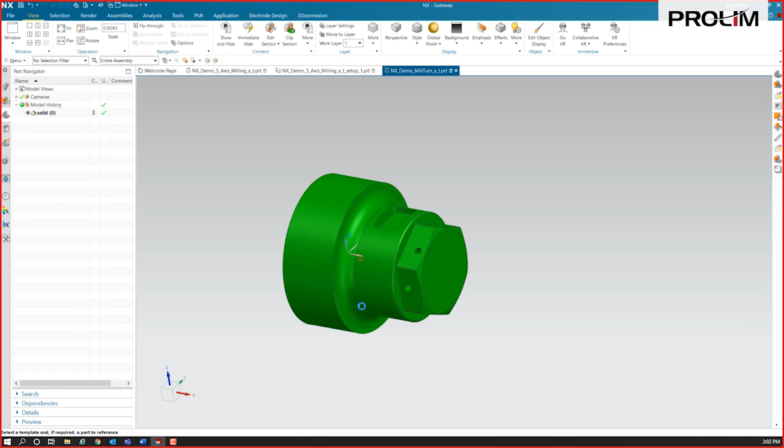So here's a part that we'll do a quick turning operation on, and we'll mill some of these features as well. I'm going to create a brand new file from this, from my master model, and put this on a machine we've got - an Integrex i200. This will give you a little insight into turning, mill-turn, and simulation.

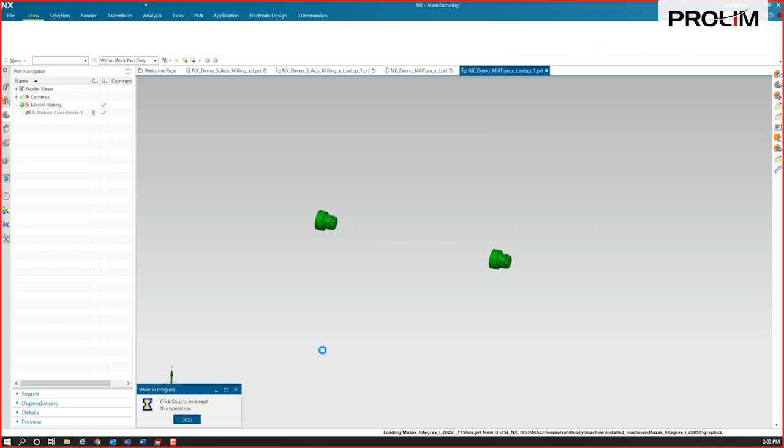This part happens to have dual spindles, so it actually brings in the part for me twice. I'll turn the model of the machine on here. So here's the machine - we've got a main spindle and a sub spindle.

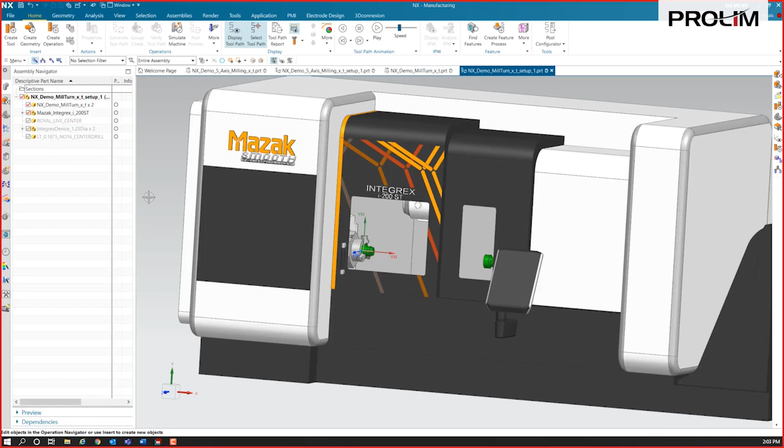Again, I'm going to start with some assembly constraints and line everything up, position everything first. So we'll start with assembly constraints. I always like to fix that machine first - I want the parts to move to the machine, not the machine to the parts.

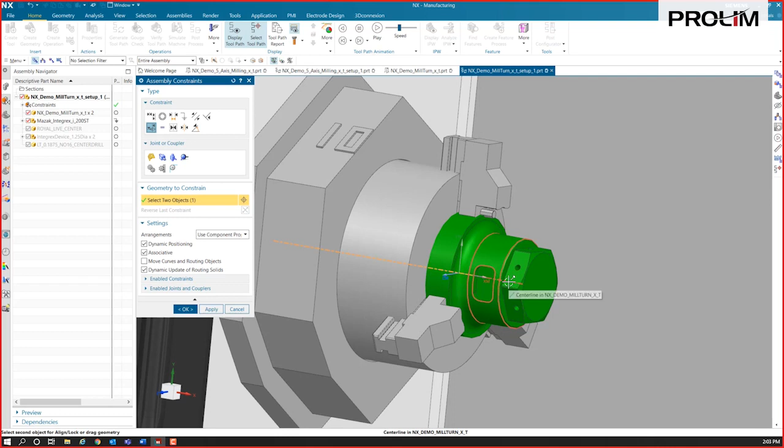So from here, we've got this one. I'm going to do an align lock where I can just grab the center lines of the parts and it's going to lock those up. We'll do a distance - I'll move this out just outside of the chuck a little bit there.

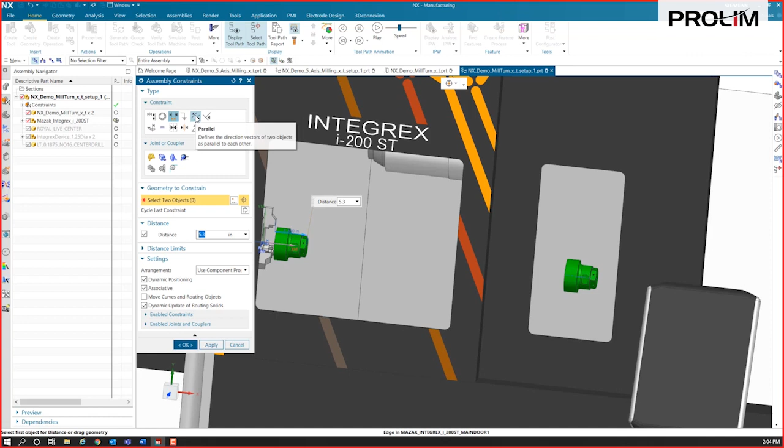All right, I'm going to go ahead and constrain this one up over here as well. We'll do a parallel here - I'll make this surface parallel to the other part here, and I'll do a center line on it.

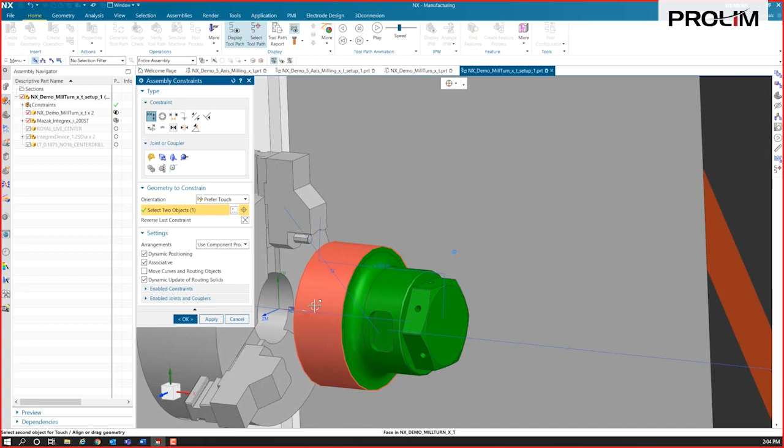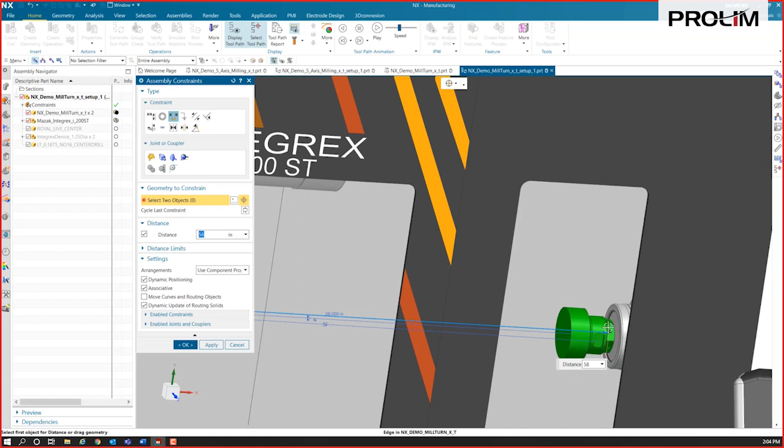So we just like to position it this way. I mean, we could certainly grab the part and just move it and lock it down too, but I like to do some of these where it's really fine-tuning exactly what you want. So I'm going to do this one as well - I'll make a distance constraint and move it out to about 58 inches should work there. So now we're all locked into place here as well.

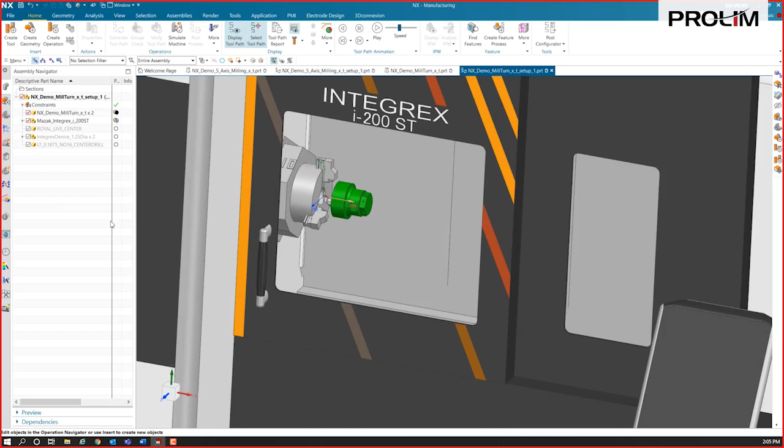Next thing I'm going to do again is that wave geometry linker - we're going to make those associative copies of these parts, that part and this part. And the next thing with this simulation that I want to do, as this spindle is turning, I want the part to actually turn with it when I run the simulation. So I'm actually going to add that into the kinematics for the part. I'm just going to define the part really quickly, as well as on the sub spindle - I just have to define that part.

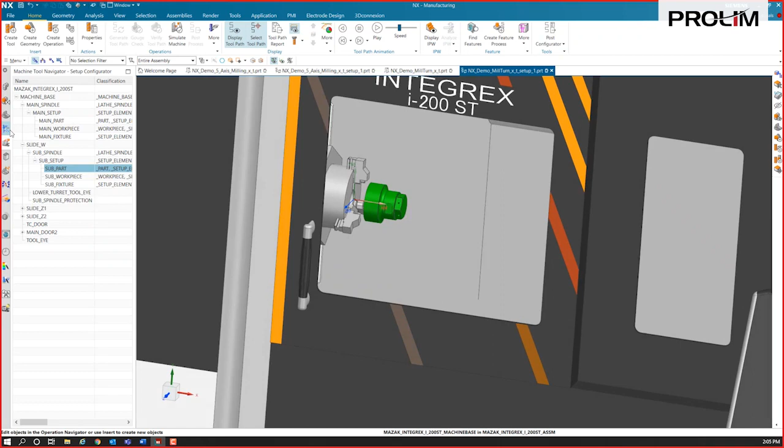All right, so now we are going to define all of our geometry. We'll take a look at these items. So this is for, kind of like, a multi-channel - this one isn't necessarily multi-channel, but it's a dual spindle. So we have a couple of parts that we're going to define here.

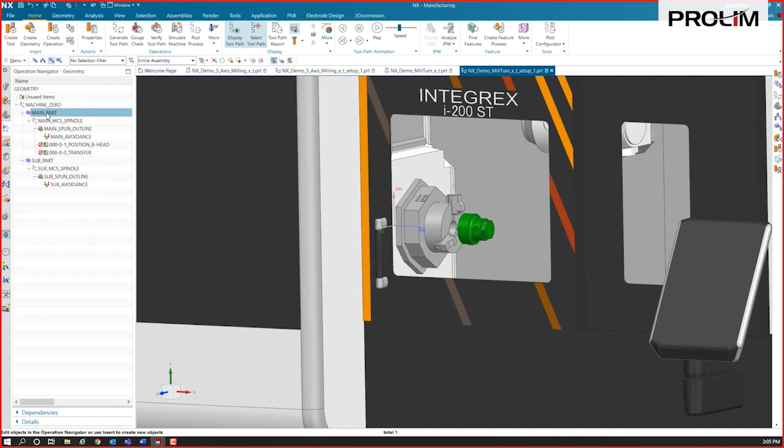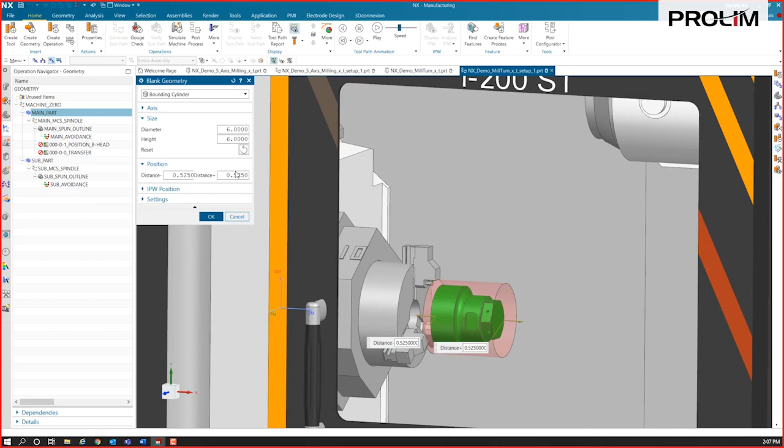So I'm going to start with my first part here, and I'm going to specify our blank using just a bounding cylinder on this one. I'm going to change my diameter of my raw stock to about 6 inches, make it about 6 inches long as well, and we'll make 50 thousandths on the front, so we're chucking on a little bit of that material on the back side here. Again, if you want to do the check geometry, we'll specify that chuck as check geometry there.

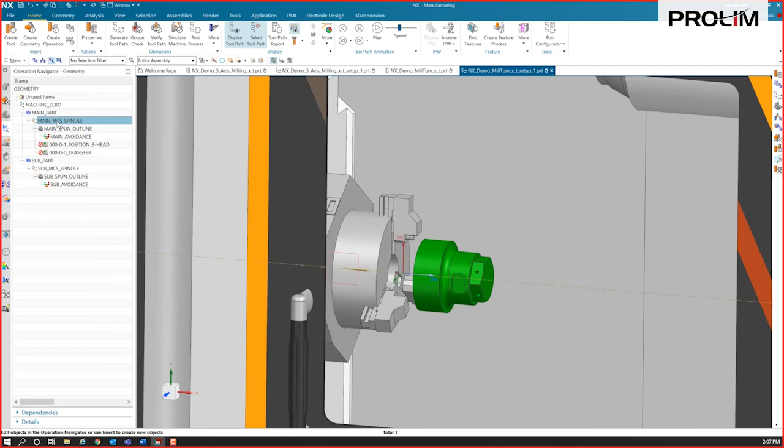And for turning, what we have is what we call - I'm going to hide that part there - what we have is what we call a spun outline. So I'm going to set my MCS for this spindle. But what we have is a spun outline, because as these parts are turning, obviously we want to know what diameter we want to turn when it's spinning. So that's what it gives us as our spun outline. So if I look at the spun outline, that's what I actually want to create as it's turning.

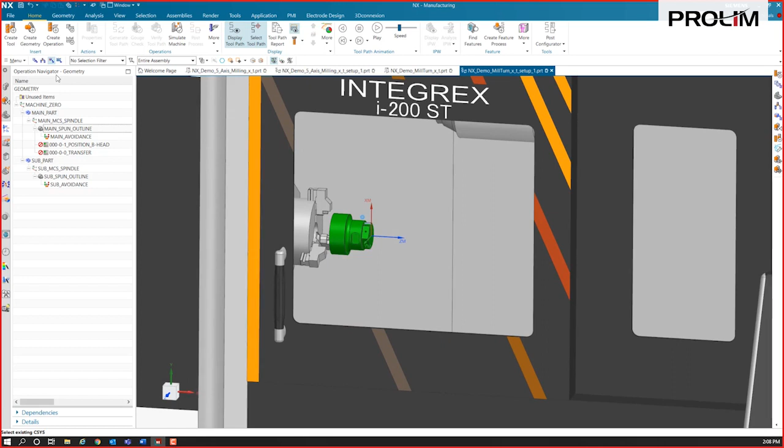We'll come back and mill the milled features later. All right, so that's our spun outline, as well as our spun outline for our blank is up here. So we'll create a couple of operations to turn this part. I'm going to start with a facing operation. And I've got a number of tools - this simulation already had some tools built into it. I've got an OD neutral tool that we'll use for that one.

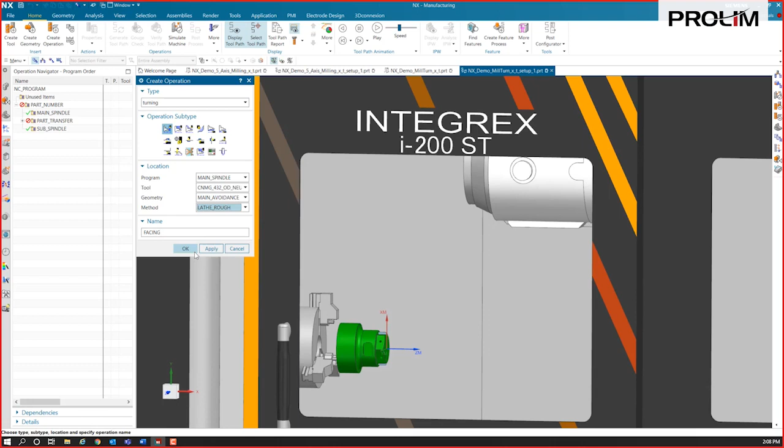We'll just rough it with the lathe, doing a lathe rough and generate that one. So there's a facing operation, and it shows the yellow as what the IPW blank was, and the green is what it just faced away.

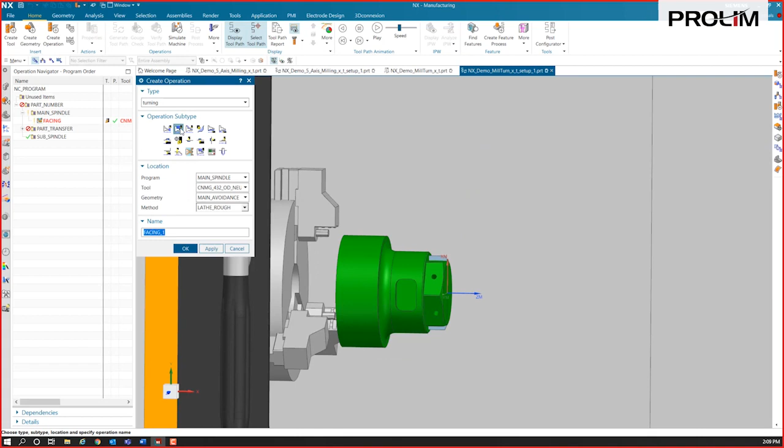I'm going to go throw a couple more operations on here, and then we'll simulate the whole thing. Let me do another operation called rough turn OD, so we're going to just rough the outside of the part.

Here, what I want to do is use a trim plane. It's going to try to cut all the way through there, and we want to make sure it stops where we want it to stop. The check geometry can assist on that too, but we can use this tool. We want to cut through and just stop it right around here, around that spot, so we can do an axial trim plane or a radial trim plane using that, and we can generate it. You see it's just going to stop there, short of those jaws.

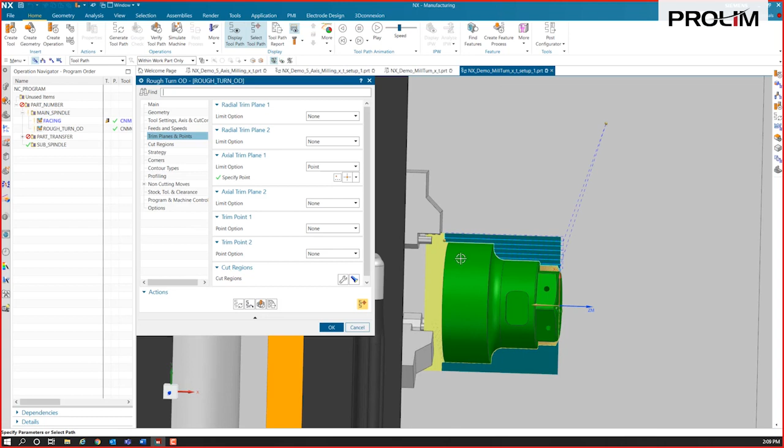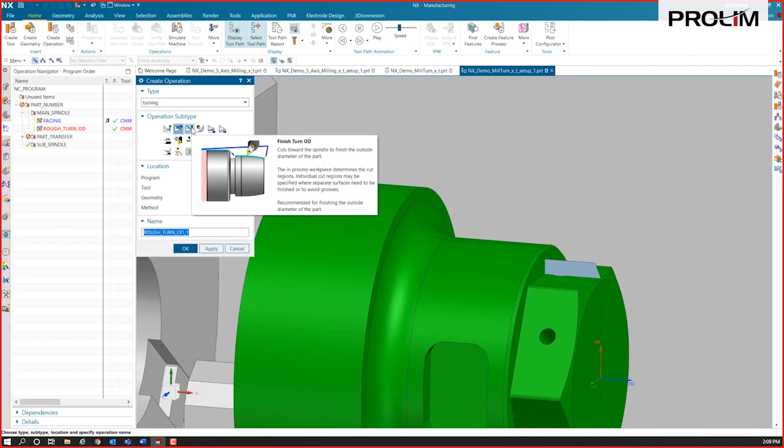So that's our roughing operation, just some simple roughing. In fact, I could take this a step further and go into this profiling, adding additional profiling. That's just going to take it right to a finished size now. It essentially took that, and if I were to create another operation after that and do a finished turn OD, it would just grab that and put it right into that operation for us.

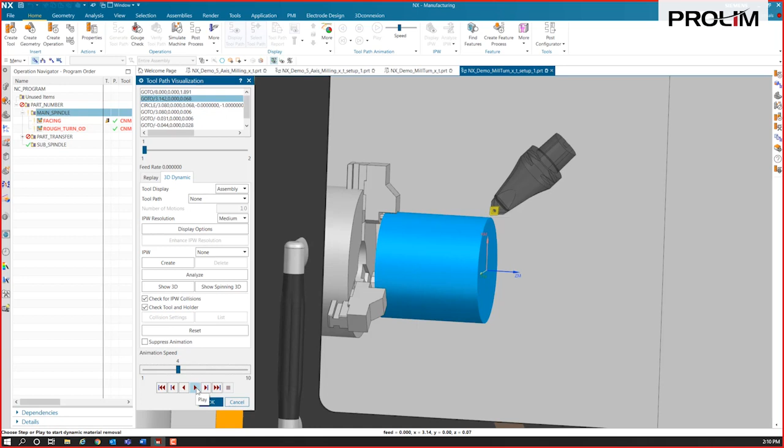If I look at that now and verify this, I'll run it through a quick verification. This is not the machine simulation, this is just a toolpath verification here. So it's just going to rough it down, then come back through and do a final finished pass like that.

Now we can go right into some of our milling on this. I want to mill this pocket first, for example, so we're going to create another operation and switch down to our planar milling operations, using that floor and wall that we looked at before.

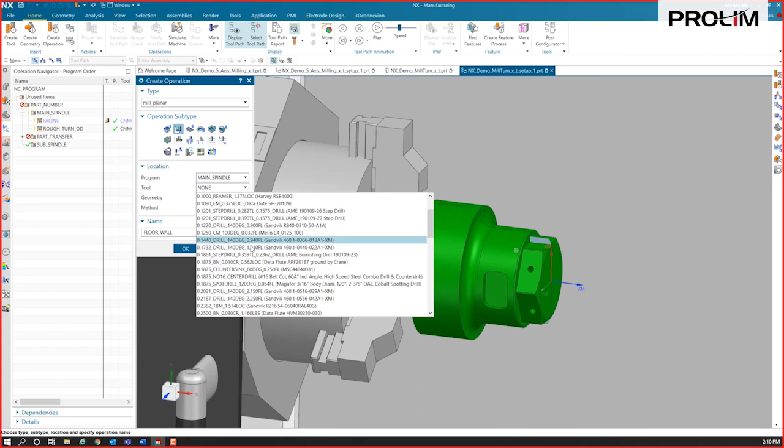I think I can fit a half inch - let's see, diameter 600 - yeah, a half inch end mill I can use to cut this. So I'll scroll through my tools and find a half inch end mill here.

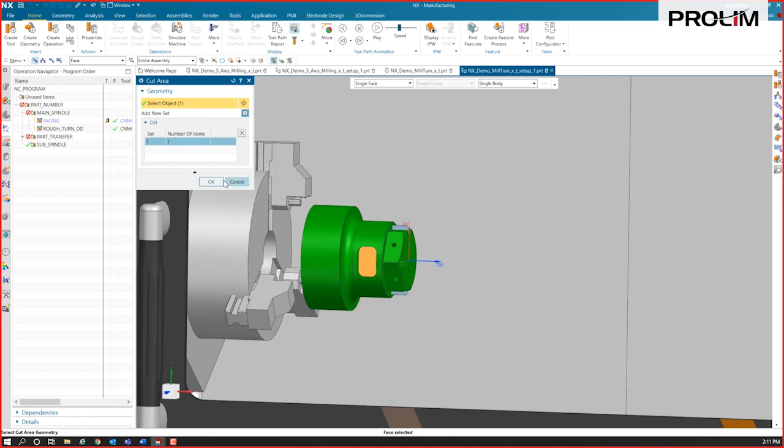Set your variables for what you want to cut, and we're going to tell it the floor of that, specifying that floor. It's going off of this MCS on the front of the part, and we can simply generate that. Once we run the simulation, it's going to know to tilt that up 90 degrees and mill from there.

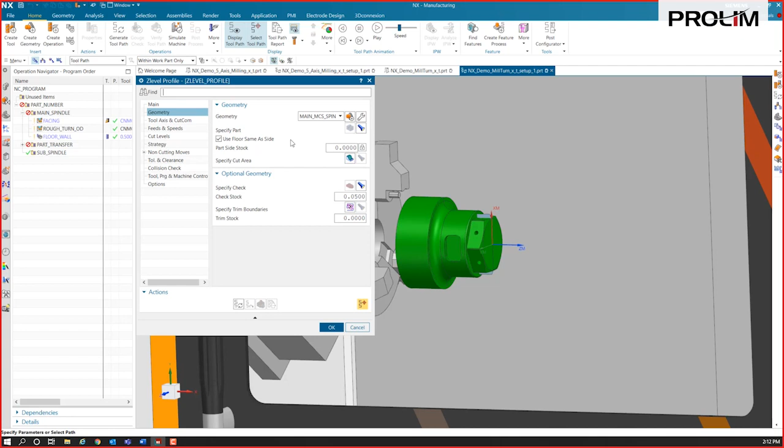The next operation, I want to cut this hex on the front, and I'll show you a couple different ways to do that. Let's start with creating an operation - I'm going to switch back over to that Z-level profile and specify some geometry. I'm going to specify some cut area, and again I like these face rules. I'll switch to tangent faces and grab one face because they've got those corner radiuses. All of them are tangent, so I can quickly grab those, and I'll just generate that.

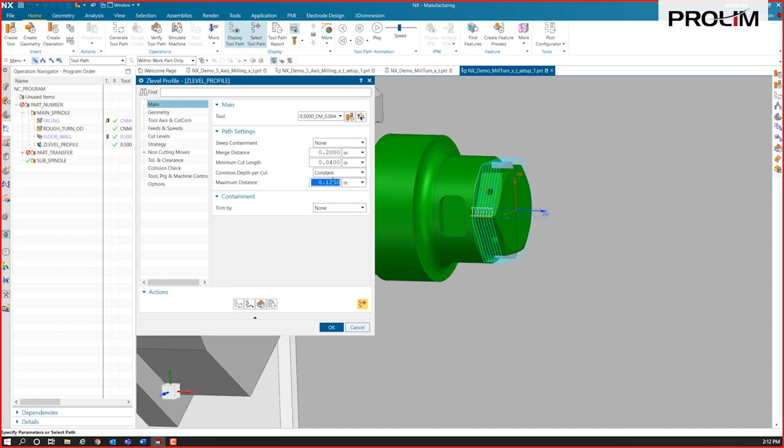So we can cut that. If you want to take it in multiple depths, we could change it to taking an eighth inch per pass, or a hundred thousandths, a quarter inch, whatever you want to do. I'll change it to 300 thousandths in this case, so that's going to take that tool and run it around the part.

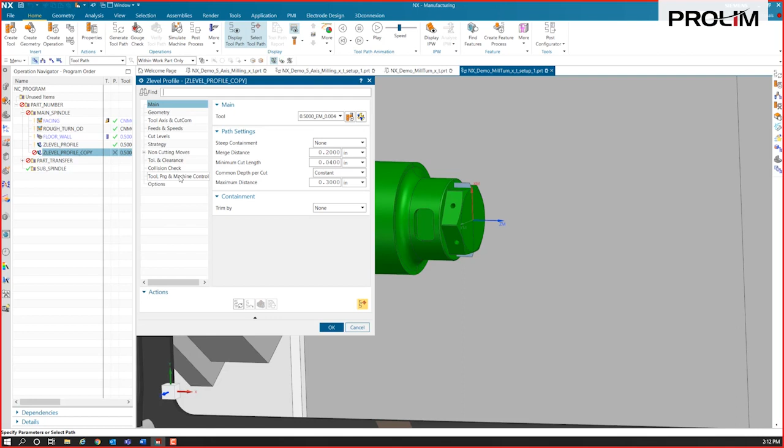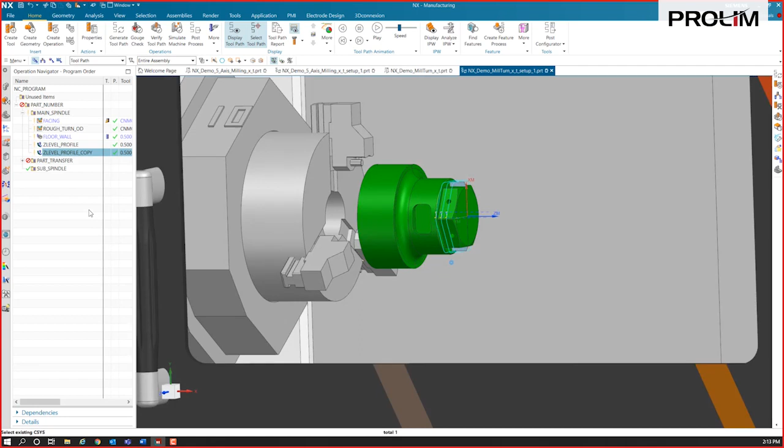Another solution - I'm just going to copy and paste this and show you another solution we can do inside the operation. We can make it more of a polar mode by using user-defined events, making this a polar event so the C-axis is what rotates for the cutter. I'll go ahead and regenerate that - the toolpath will look exactly the same, but once we verify this and run it on the simulation, you'll see the difference there.

I also want to drill these holes.

So let me see what diameter these are. They're 1/4 inch diameter. I don't know if I've got a 1/4 inch tool, but I could add that in, but I'll just find something close.

I'll switch to a drilling operation, and we'll find a 1/4 inch. I don't think I have a drill though. Yeah, so here's a 218 drill.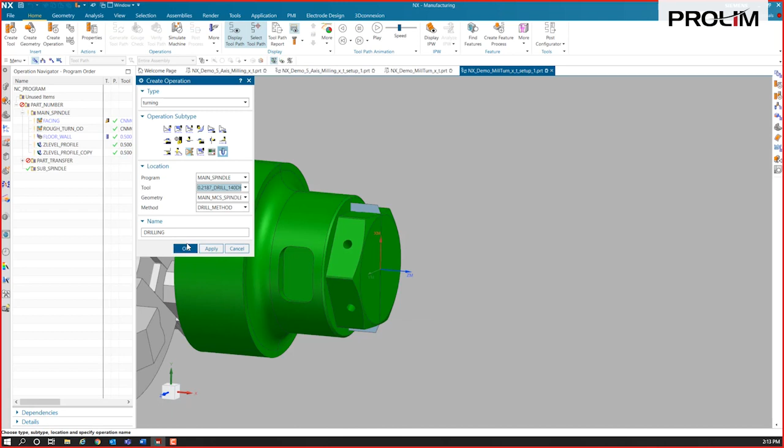Which is good because I'd like to show you how we can look at that preview of these drills. So it's previewing what it's going to drill. It's not just previewing in pink the hole, it's previewing what it's going to actually remove. So it's a little smaller because that drill is a little smaller.

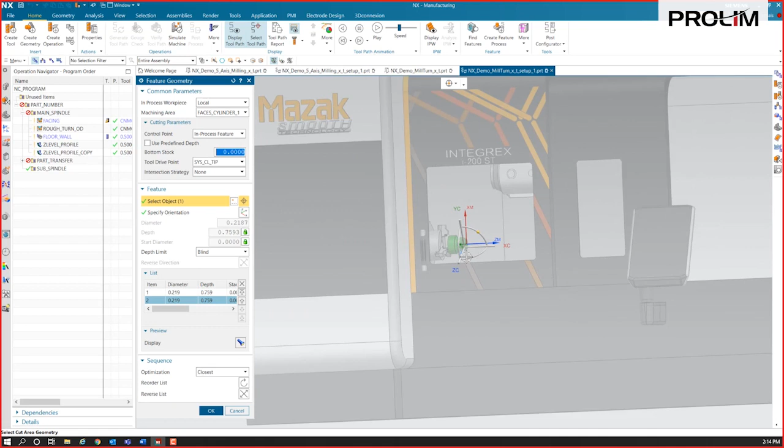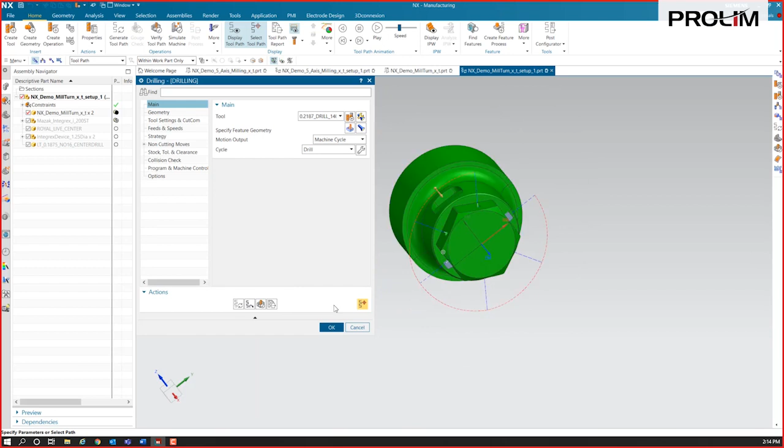All right, and then we're going to just work our way around and select all these holes. My machine's in the way, so I'm going to hide it away for a second. We'll work our way right around this, selecting all these holes. 5, 6. So we've got all 6 holes there. And we'll just generate that one. So there's our holes generated.

It'd be simple enough if you decide something's out of order a little bit - I'll turn our machine back on - you can grab that drilling operation and move it up and reorder things pretty quickly. It'll let you know that there may be some things with the IPW that it's going to have to update and redo some things. You just have to regenerate toolpaths then.

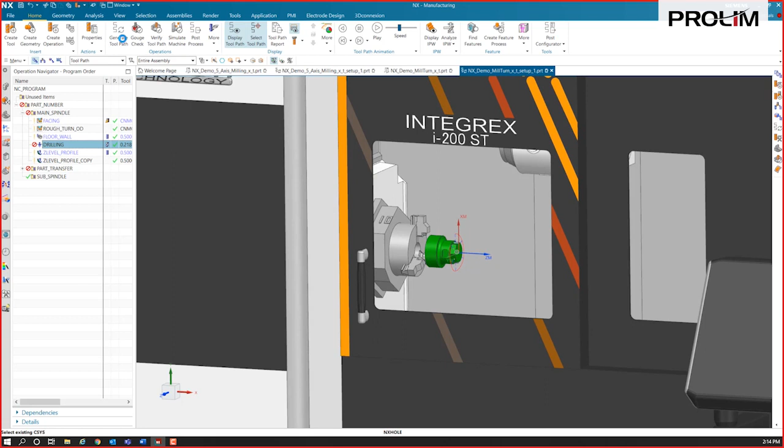So that's the toolpaths for the front. Let's take a look. We'll just go ahead and run this through a simulation here.

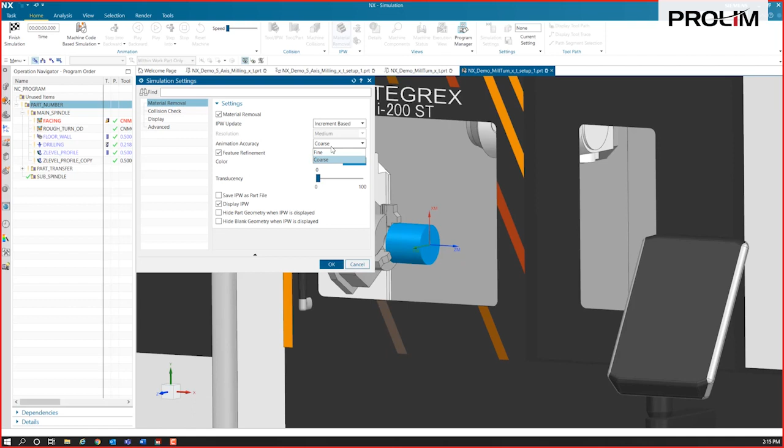Let's see what we get. We'll set up, we'll show some material removal. I can set some simulation settings. We can make these increment based, fine. We can make this translucent as well, if we want to see through it a little bit, we can see our part in there now. I'll turn our spun outline off for now too.

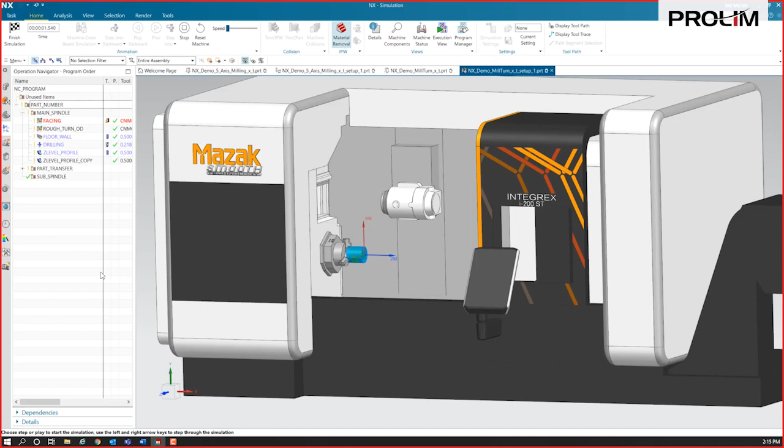So let's go ahead and run this through and see what we get out of our simulation here. So we've got the tool changes in there, and then you'll see all the spun kinematics start up, and you'll see the material removal.

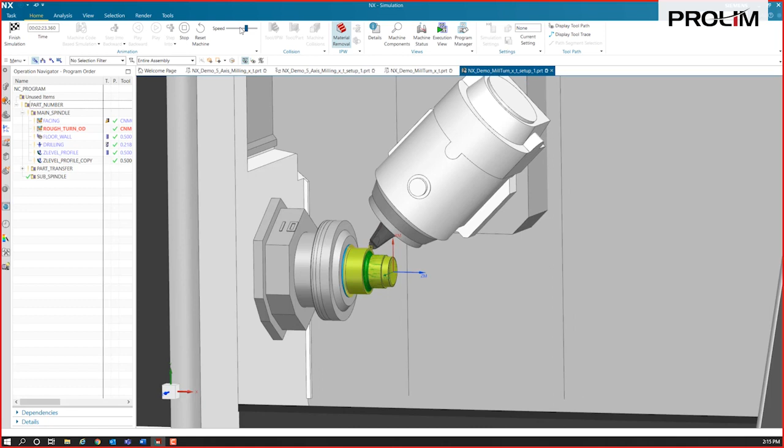Okay, everything's stopping short. There's our next tool change to our milling. You can see everything spinning up for it, and then it mills it out.

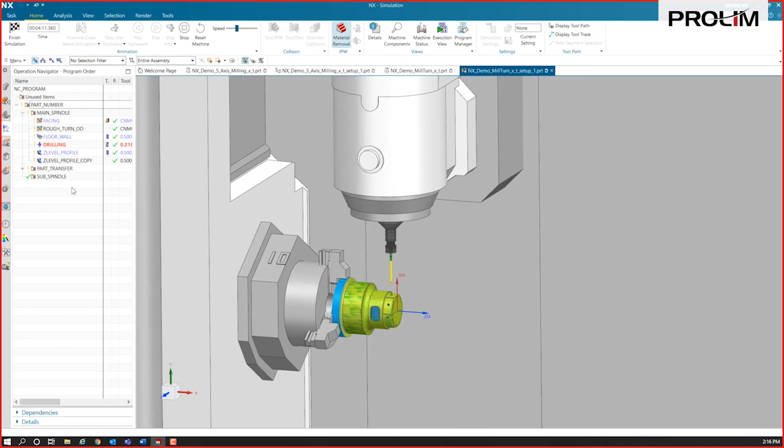Here's our drilling. And then the next one are the Z-level profiles, where one of them is going to be polar, the first one is not. So the upper head here is actually moving around the part, as opposed to the second operation where the part is going to rotate. So this one, the part is actually just rotating using a polar operation here.

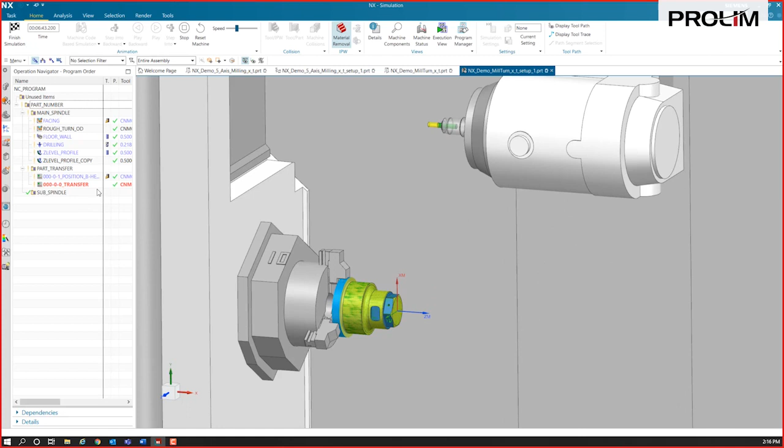All right, and then we're doing a part transfer, and it's going to move that IPW over to the second side. I've got those set as UDEs in here that I've already populated, and it just moves that right over to that sub spindle. And now we can create our facing operation.

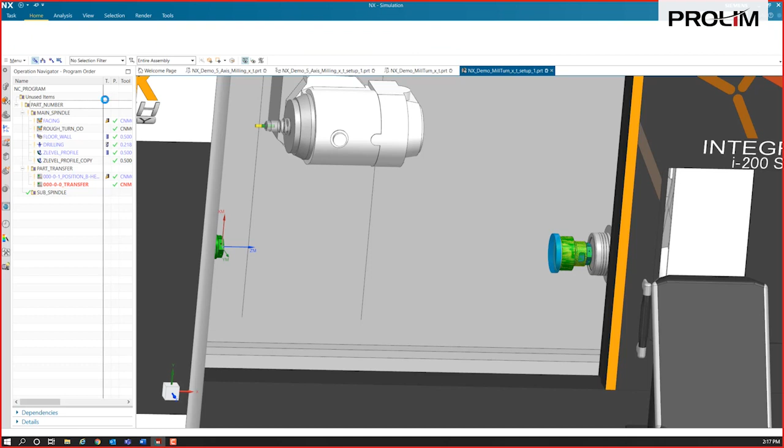We can create a new facing operation on this side of that sub spindle. So let's go ahead and do that. We'll define our sub spindle workpiece. We're going to specify that part and that blank, the raw stock.

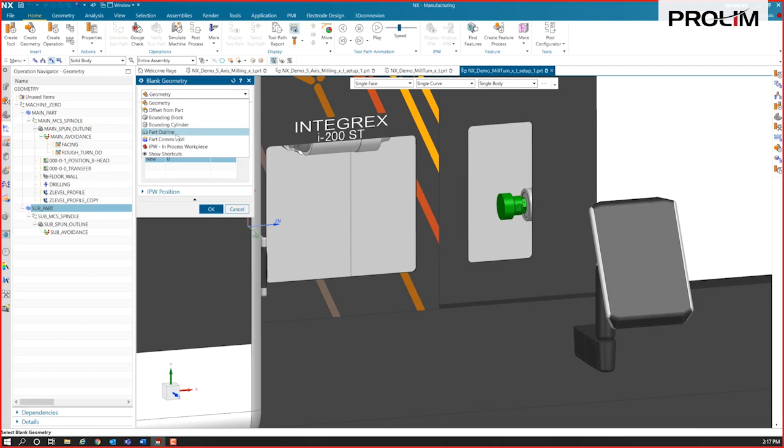In this case, instead of geometry or an offset outline bounding cylinder, we're going to use the IPW - that in-process workpiece of this main part right here. All right, we'll update that, and that's going to give us a starting point for that IPW being the blank here. So there in pink is what we're specified as our stock now.

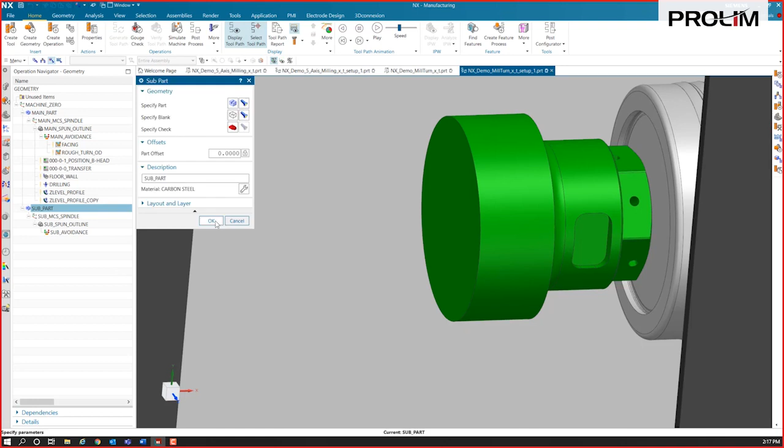All right, and we've got our MCS set to the face of the part there. Our spun outline is showing up here, and you can see the blank definition from where the face OD, the OD roughing stopped short.

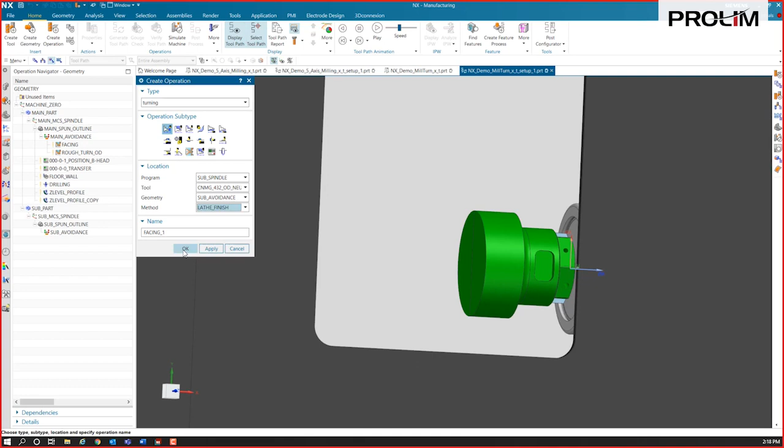So now we just create a new operation in our sub spindle using, we'll just do a simple facing operation. We'll grab our CNMG tool again. We'll do the sub, and we'll just go right to a lathe finish. And now I just have to define, in the tool axis, I'm going to set that instead of that tool being on a 45 degree, I'm going to move that over to a 135 instead. And we can generate that.

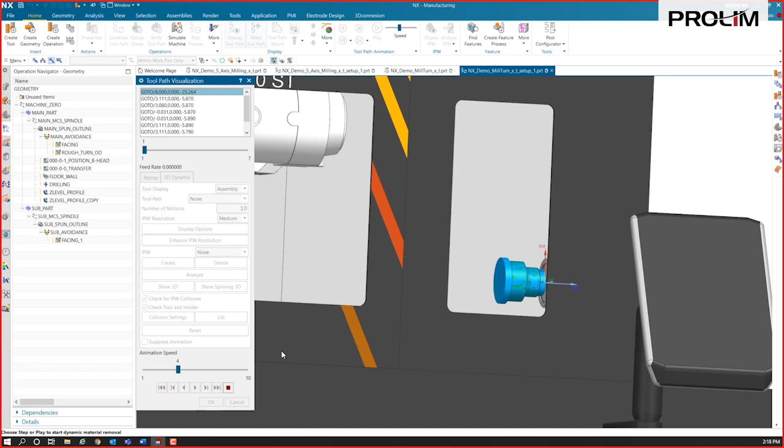So we can see that tool is moving in this direction now. Okay, so if we'd like to see the entire thing simulated once again, we could do that. So we'll grab the parent and simulate the entire machine.

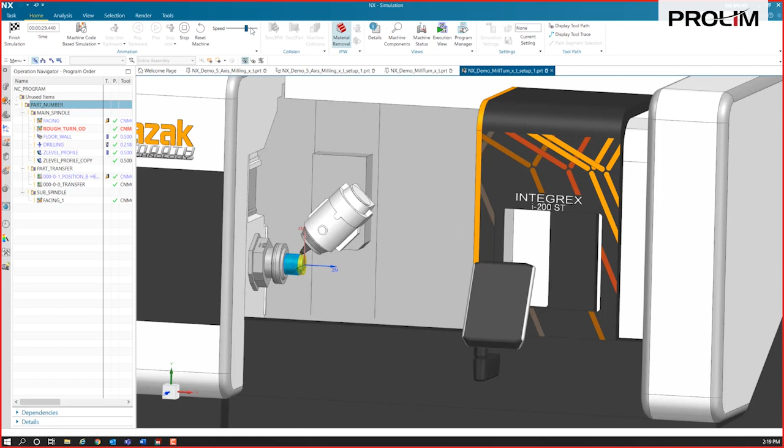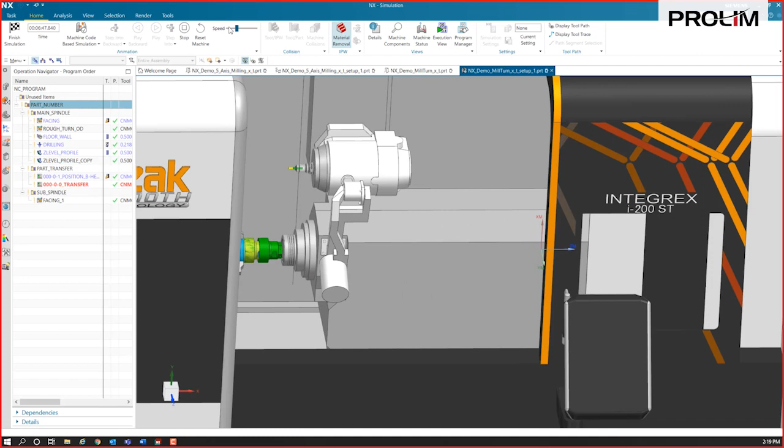We'll speed it up a little bit here. We've seen this part of it already. All right, and then we'll see the part transfer. It changes tools and cuts the other side. So that's it for the mill turn.